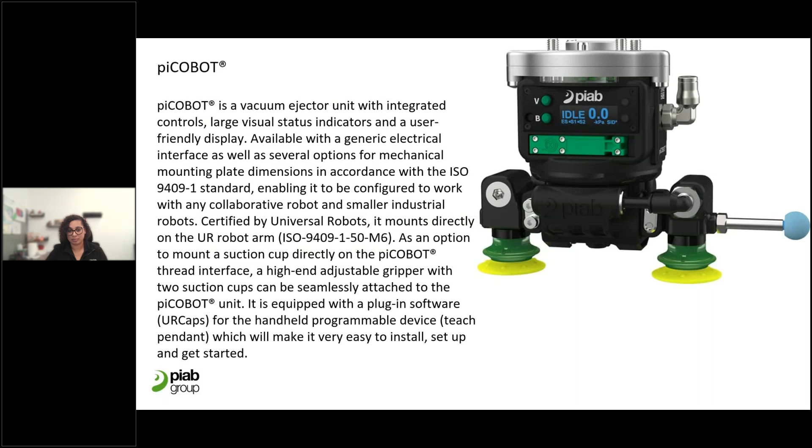But with this piece here, it has the ejector, the valve is all built into this unit, so it can be programmed for vacuum, blow off, and those functions. You could mount different types of tools. You can see it with the two vacuum cup piece on it now. That part can come off, and it could have just a single cup or even a custom type of tool that could be made for a specific application as well. But again, very plug and play and very simple software.

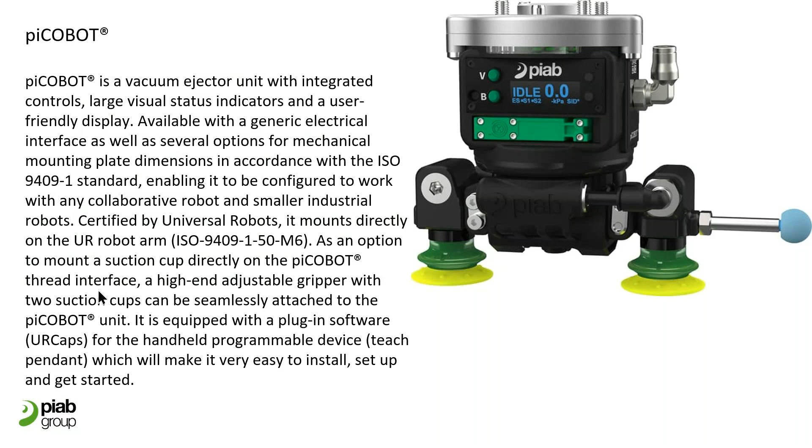If we look at the following page. So the required air is about 65 psi, it will draw 1.23 SCFM. Overall capacity 15 pounds or 7 kilograms. It only weighs about 1.42 pounds, so it's quite lightweight and helps maximize the payload capacity of any cobot. And please keep in mind the gripping capacity is 15 pounds. This could be variable based on the porosity of the load.

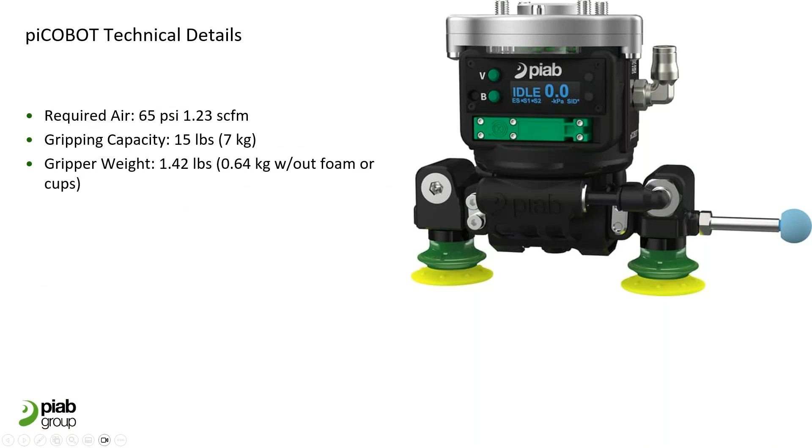The next tool in this series is the PiCobot L. So not much different than the PiCobot, other than it's a little bit larger footprint, but also a much larger capacity. 35 pounds is the maximum payload for this piece. Again, many of the same functions.

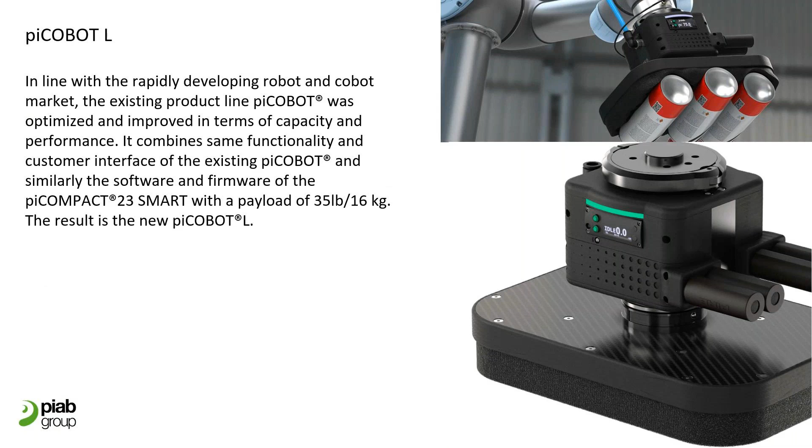For those familiar with the PiCompact 23 Smart vacuum pump that PIAB offers, this uses the same technology, the same type of cartridge and feedback as that pump. So very intuitive, and again, builds on what the PiCobot series does with a larger footprint.

If we look at the technical details, the minimum required air in feed is 72 psi, 1.53 SCFM, and then 32 pounds for maximum capacity. And again, the same situation applies based on the load, porosity, and type as well.

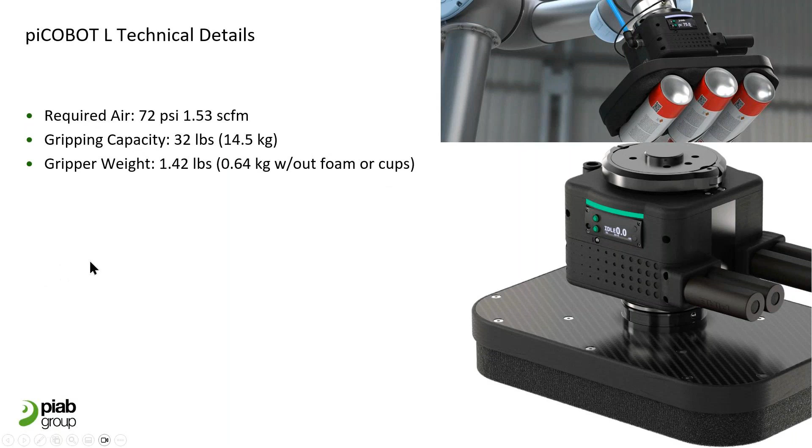Now, a new system that PIAB has developed and launched this year is the PiCobot Electric. We're pretty excited about this pump. It's been in development for a while and finally launched. It has all the features of the PiCobot tools, except instead of using compressed air to develop the vacuum, this is done electric. So, kind of getting more with the electrification of pumps and this type of technology. That's what the PiCobot Electric is there for.

Good on mobile applications as well. One of the unique things, it could be powered off of the cobot itself. It doesn't take any external power source in order to turn it on and off. So it can be totally mobile.

And one of the things that sets it aside from some of the cobot electric pumps that are out there is the amount of flow. PIAB has always been known for getting more flow by using the lowest amount of feed pressure. Well, in this case, using voltage instead of pneumatic air, just in the same rhythm, we can develop more flow, which can handle cardboard boxes easily and other porous types of materials. So that definitely sets it aside from a lot of the competitors out there.

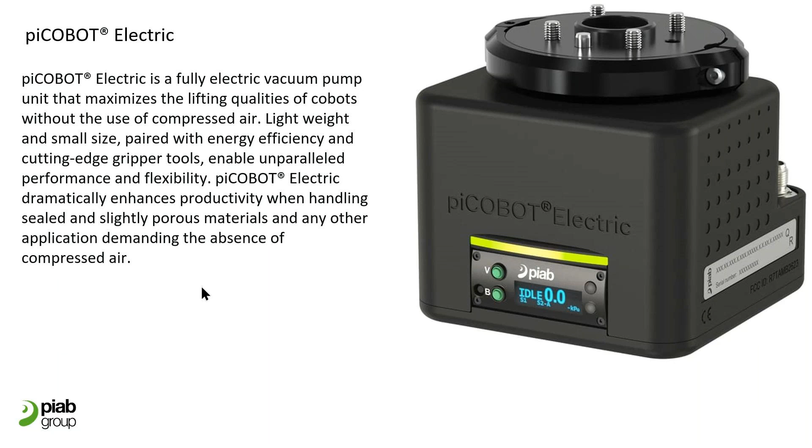Oops, I think it went back.

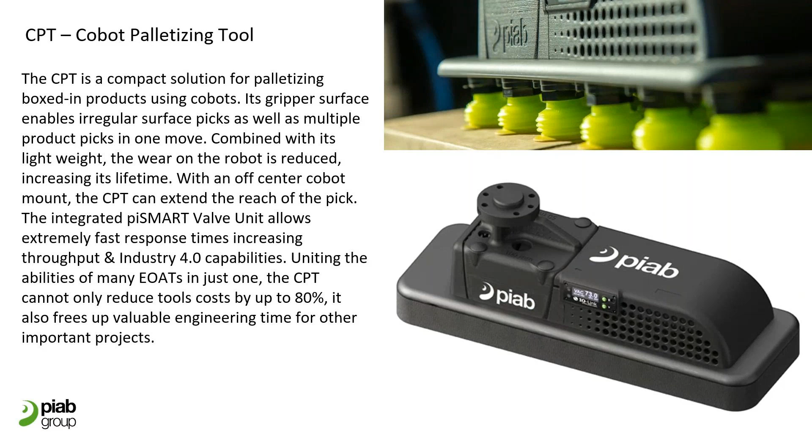Okay, sorry. The next item is the CPT, or the cobot palletizing tool. Again, this was something that was part of PIAB's what's called custom line group, tools that were made on basically a one-off basis. But the popularity of this tool and the usefulness has brought it into the full lineup of tools now. So if you go on to PIAB.com, this is now a configurable item.

And this is great for palletizing, cobot palletizing, again, a quick growing business. This type of all-in-one tool is a great addition to our lineup. Again, same technology as far as the vacuum pump and the feedback built into this tool. It's IO-Link ready. Again, the same features of the PiCobot or PiCompact series pumps are built into this as well.

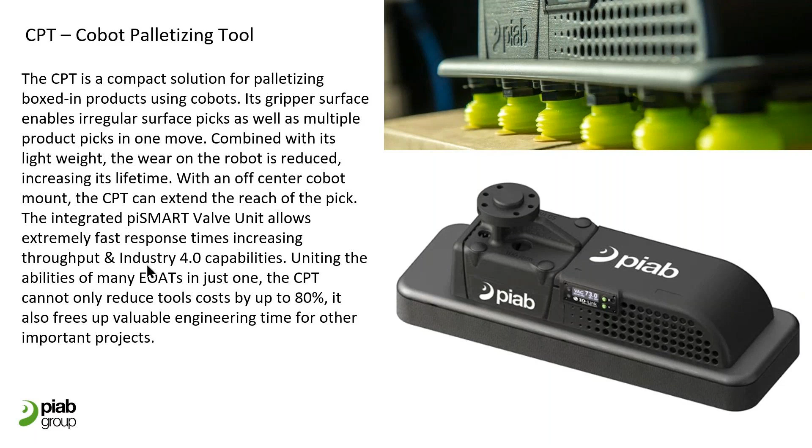And you could see the mounting. It has two different mounting features on it, depending on the amount of offset. So if you see where the robot mount is, that part is removable and it could be turned so you have more extension or less. One thing to keep in mind is that mounting position does have an effect on the overall capacity.

The maximum capacity of this at 87 psi of feed pressure is about 44 pounds. And again, it's a pretty lightweight gripper, 3.64 to 5.84 pounds. The one on the top right could have rows of suction cups, or it could have a plate that has a foam gripper as well. And those would be the difference in the overall weight. And there's also three sizes of different footprints for this tool as well.

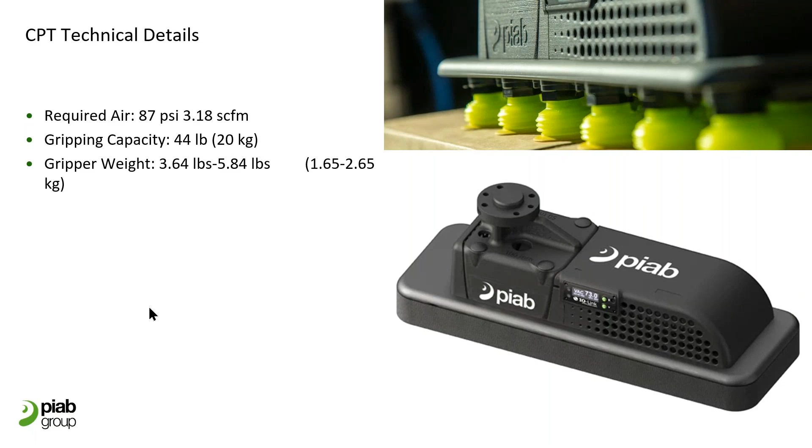Next is the Kenos line. One tool that's becoming more and more popular from the foam gripping side is the KSL, or the Kenos Safe and Light, as you can see in the center. This is a very simple tool that could be mounted to any cobot, and it does require a single compressed air feed that would go to it. But this has the pneumatic ejector and everything built right onto the pump itself.

Very lightweight piece, very easy to replace the foam. We have a magnetic style foam now that's available for this, so quick to maintain and very easy to use, very lightweight. The body of the tool is made out of a foam material with a carbon fiber top plate that the pump mounts onto. So again, very lightweight. You could see the other types of simple tooling, the Kenos FlexiGrip, in a round or a square orientation, and then the Kenos mini grips, various sizes of round, rectangle, and square.

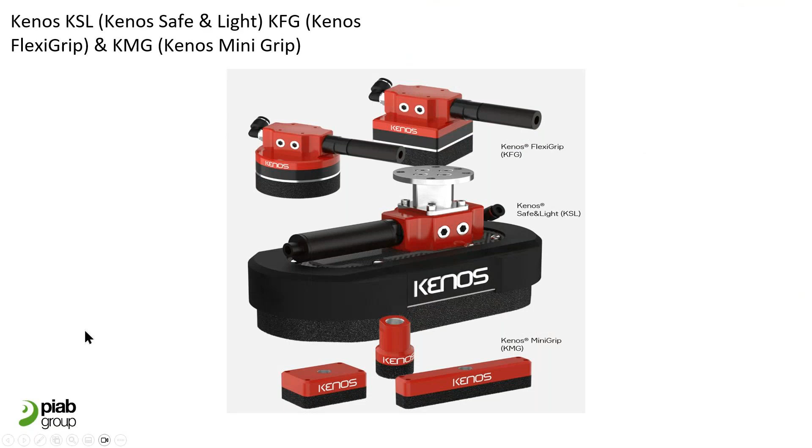Next is the KCS, the PIAB KCS. This is a cobot tool that uses a foam gripping technology as well. The foam plate is removable. There's a 110 by 110 and a 150 by 150 millimeter option, so you could take one off and put the other on very easily. So with foam technology growing in so many different aspects, this has always been a great piece for us as well. And just like all of the PiCobot series, this has everything built into it: the pump, the valve, blow off as needed, and any feedback.

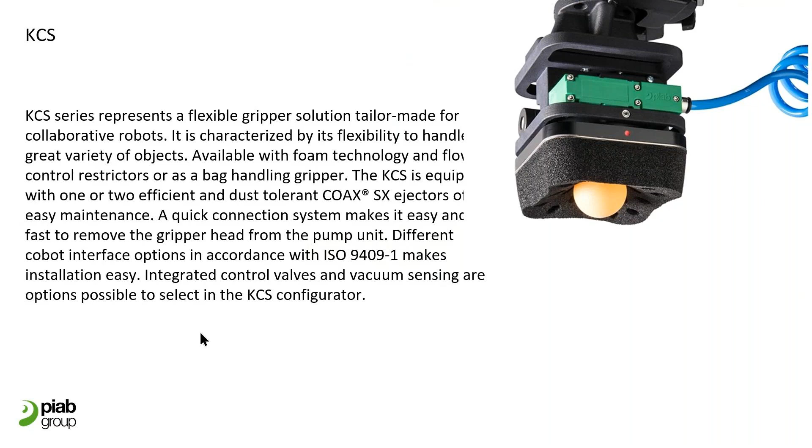This has about 10-pound capacity on this tool at 72 psi of feed pressure. Again, very lightweight like the rest of the series, though. The maximum is 1.67 pounds.

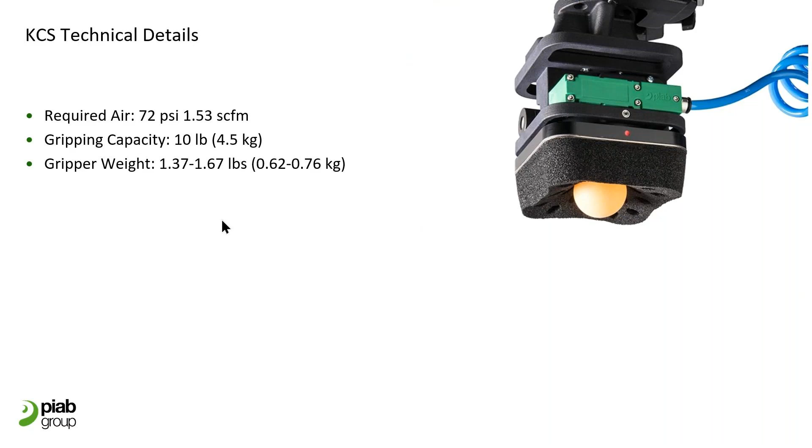The next thing is what's called the PIAB Custom Line Group. You can see on this page, it's just a series of different custom tools that we've built, and many more, obviously. These are custom configurations that could be made, most of them 3D printed. And one of the good things about this is with most of these tools, the vacuum ejectors themselves can be incorporated right into the body of the tool.

You can see, for instance, the third one on the top is made for gripping onto bags, with the cups that have the ejectors built into it. The one on the bottom right has 6 ejectors built into it, and those could all be turned on and off individually. So it could have multiple zones with that configuration as well. So we can design custom tooling for odd shapes or sizes, or to best fit any type of load.

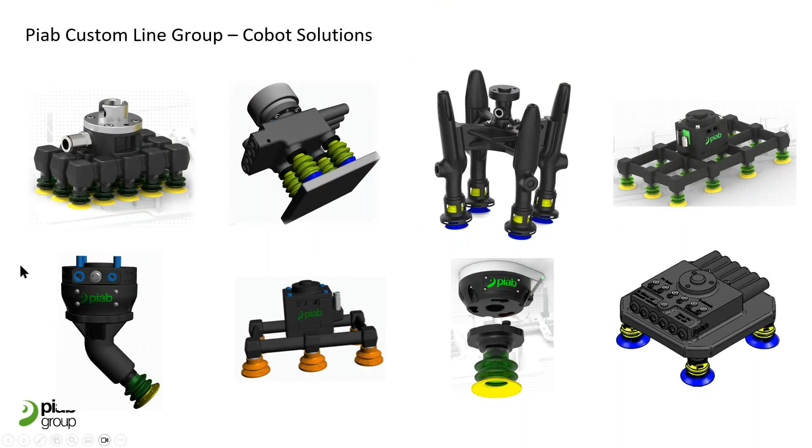Oops, I need to go back. Is it possible to move this back? There you go. Okay, sorry about that.

And then a couple accessories. PIAB is now making an automatic tool changer. You can get that with a docking station where you could park a tool and then grip onto another and put that into service. The foam gripper heads, as I mentioned, on the KCS, there were 2 sizes. But if you were utilizing the Pi Cobot Large, for instance, you could see sizes that go up to 420 by 260 millimeters. So it's a pretty large rectangle surface for that as well.

The adjustable suction cup head that you saw on the Pi Cobot itself, and then obviously any suction cups that are suitable for the different load types that PIAB offers such a wide array of.

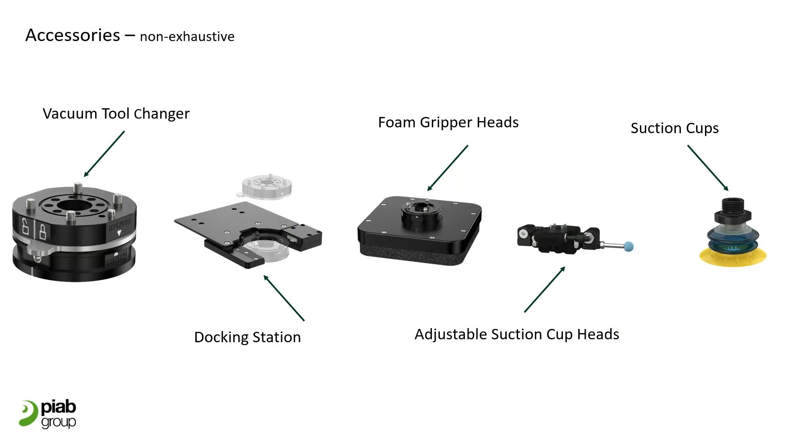All right. So with that, we'll ask any questions. Ron, we do have a few questions for you. Quite a few, actually. So we'll take a couple minutes here, and if we have to get to some more at the end, we will.

First question I have, does the PIAB Pi Cobot Electric work with any robot manufacturer, or is it available with a universal communication interface, IO-Link, Ethernet, digital I/O, etc.? The Pi Cobot Electric currently works only with 3 types of UR robots, and those are the E series, the UR5E, the UR10E, and I believe the UR16E. Those are the only working models right now. I believe in the first quarter of 2025 that will be opened up to other models, but it is limited right now on those particular cobots.

Okay, great. Next question, how does the Pi Cobot Electric handle porous products compared to the non-electric one using compressed air? Again, it does give up a little bit of flow compared to anything that's using compressed air. It's probably more susceptible to the porosity than a compressed air tool right now. But again, for this feature and this new technology of electrification, it does have quite a bit more flow than the other electric pumps out there. And the spec sheets on these are available easily at the PIAB.com website, where we could look at any individual flow ratings versus another.

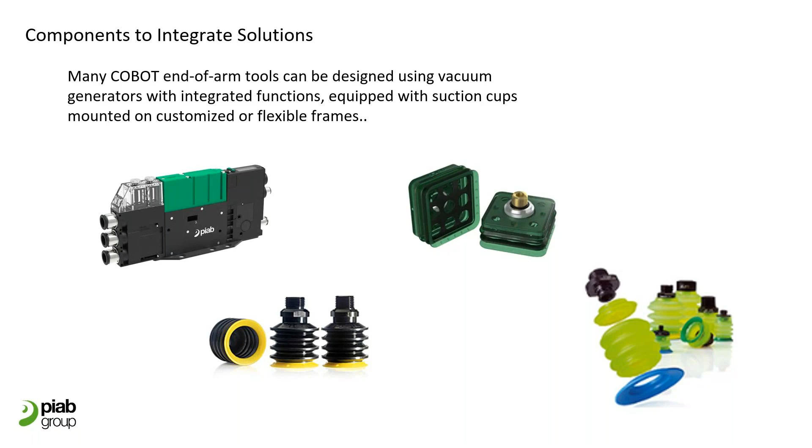The first solenoid valve is the control valve that allows the compressed air to go into the vacuum generator unit. That is the same COAX technology that PIAB uses, but the cartridges we use here are very resistant to dust environments. The second solenoid valve is used for the blow-off function that sometimes is required to release the parts very fast.

So we have a different type of configuration. It is very flexible. For example, this valve, the solenoid valve for control, can be a double solenoid valve, so we have a bistable possibility to make the end of arm tool safer.

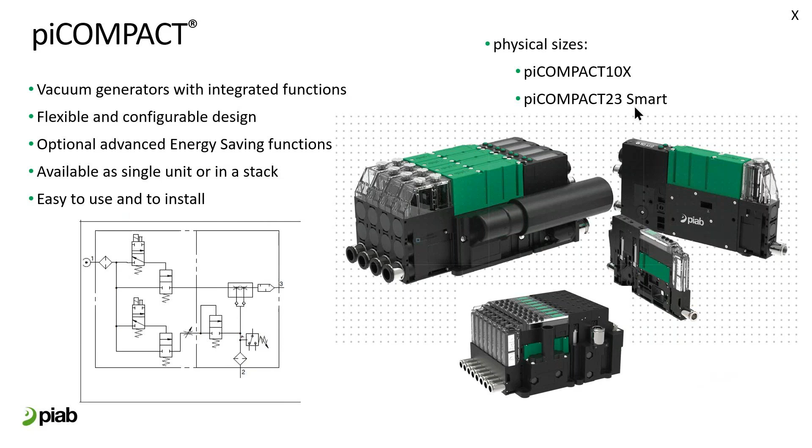We have two different sizes of the piCOMPACT, the 10X and the 23 Smart. But basically for end of arm tools, the 23 Smart is the one that we recommend because of the high flow that we can develop with these units.

The cartridges that we use are the ones you can see here. Those are very resistant to dust. And usually for end of arm tools, we recommend the SX42, which has enough flow to grab cardboard boxes that are usually porous.

Here we have an integrated solution, a very lightweight solution. Each piCOMPACT weighs less than 12 ounces.

We can create an end of arm tool that is very safe using the two solenoid valves. We can increase our speed using the blow off, and we have the energy saving function to reduce the operational cost of the end of arm tools when the boxes are not very porous, or when we are managing products that have no leaks.

We can program a preventive maintenance option because of the possibility to set the vacuum level at a maximum and a minimum, and to have the signal that we have grabbed the part, we can make a type of surveillance in the system, and finally predict when we require, for example, maintenance.

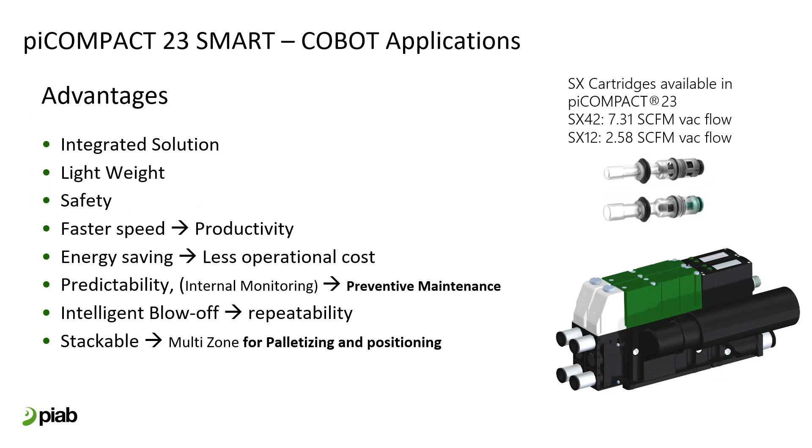And the blow off that I already mentioned. And stackable, that was the function that I mentioned before for multi zones.

This is the way that it is connected, the SpiderPik system design that IRIS is going to present later. Basically, it includes two Pi Compacts. One of those manages one zone of the system, and the other piCOMPACT manages the second part of the system.

In this case, when you pick two boxes at a time, both units are energized. But when you need to release only one box, you need to turn off the power to only one of the units.

The system design drastically affects the performance of a palletizer, because it is necessary to take into consideration the vacuum level that is required and the time of response of the unit. This is the reason the piCOMPACT is very important, because you can install this very close to the vacuum cups that you are going to use in the system.

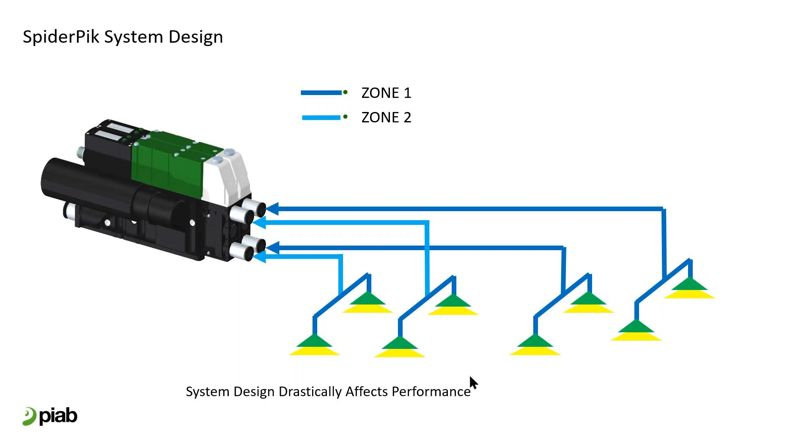We have the possibility to have direct wiring and standard wiring, and use IO-Link for the piCOMPACT. It makes it easy to communicate with any type of field bus system.

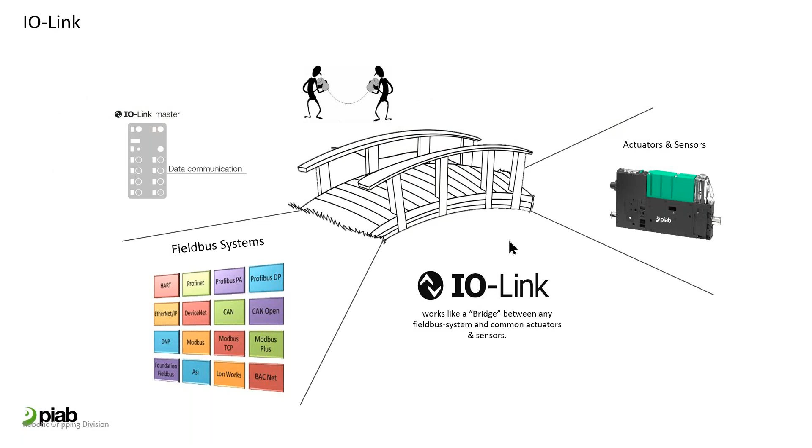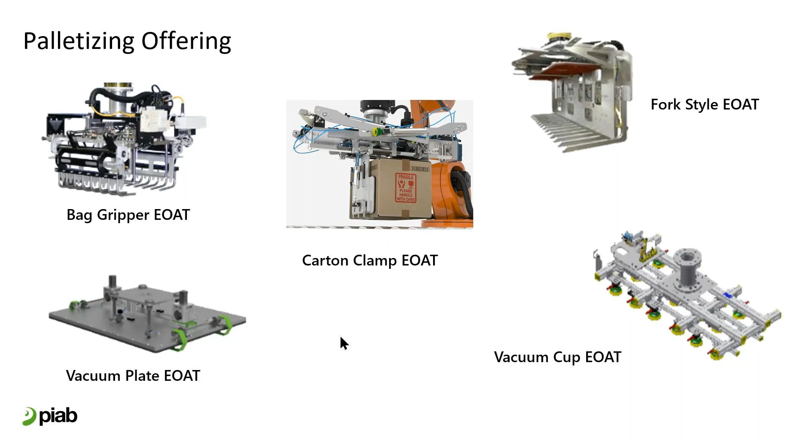Finally, I'm just presenting that we have many different possibilities of end-of-arm tools for industrial robots, for big robots that can handle big boxes or big sacks, for example, even wood or different materials or different elements with high weights in industry applications.

These are a few examples of the materials that can be handled using our big end-of-arm tools, for example, big crates or sacks or big boxes too, or cardboard boxes that cannot be handled by means of only vacuum because of the weight or because of the way it must be palletized.

So for more information, you can contact us and tell us what your application is about, or you can contact IRIS to tell us what your application is and what your needs are.

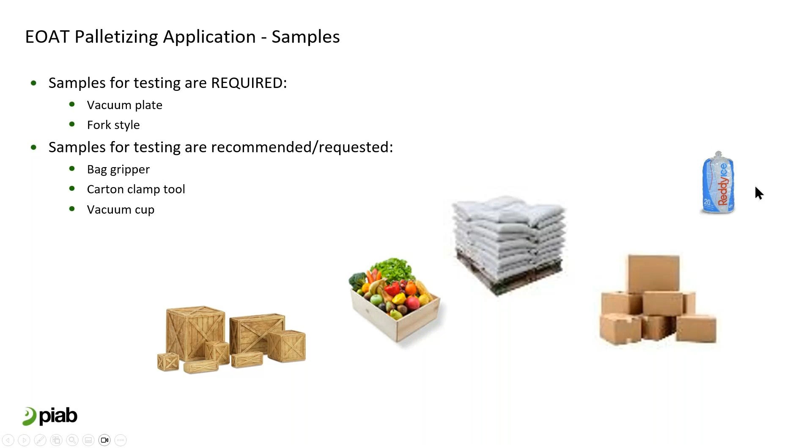Yes, those can be used for dusty environments because we use very dust resistant cartridges without flaps. Additionally, the piCOMPACT have filters that are easy to replace.

What are the advantages of using piCOMPACT in customized cobot tools? The main advantage is that this is a very light unit with everything inside, which makes the customized end of arm tool very efficient and light, having everything in the same body. Additionally, it can be customized so that if you need to maintain the box in case of power failure, you can have a double solenoid valve that still uses compressed air to create vacuum while you have a reservoir available to supply compressed air.

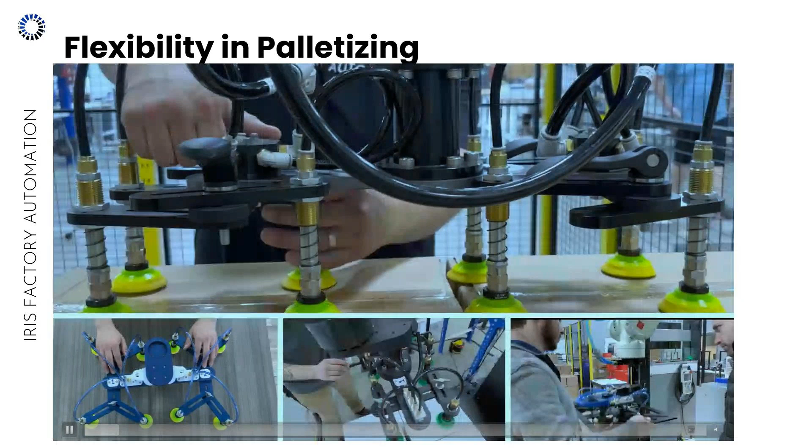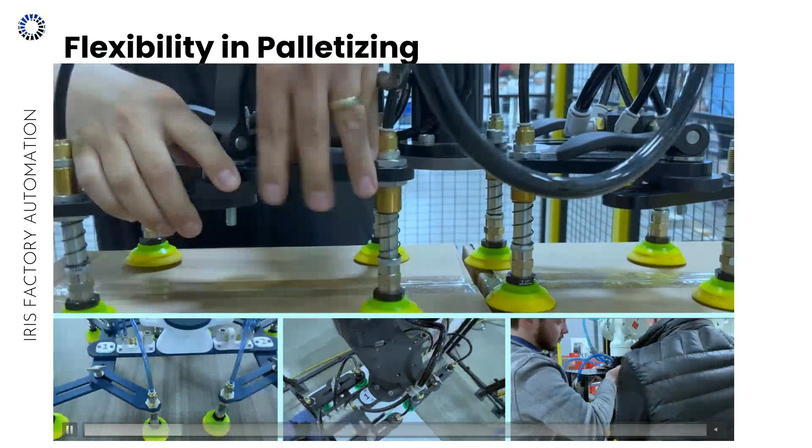Here's our spider pick, which we'll talk about during the presentation. This is our standard end of arm tool, the dual zone tool that Hernando mentioned, which is super effective for hitting faster rates, picking two at a time and being able to independently place those boxes on the pallet.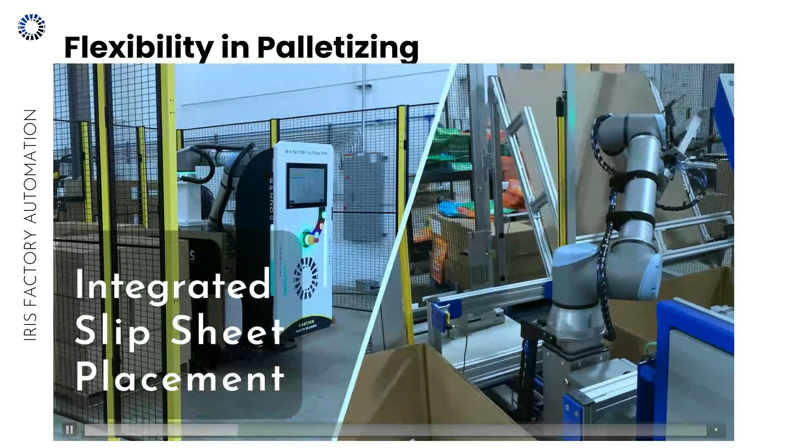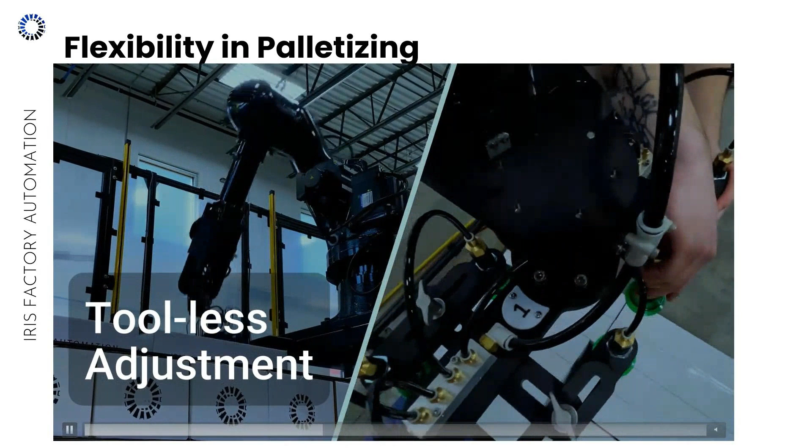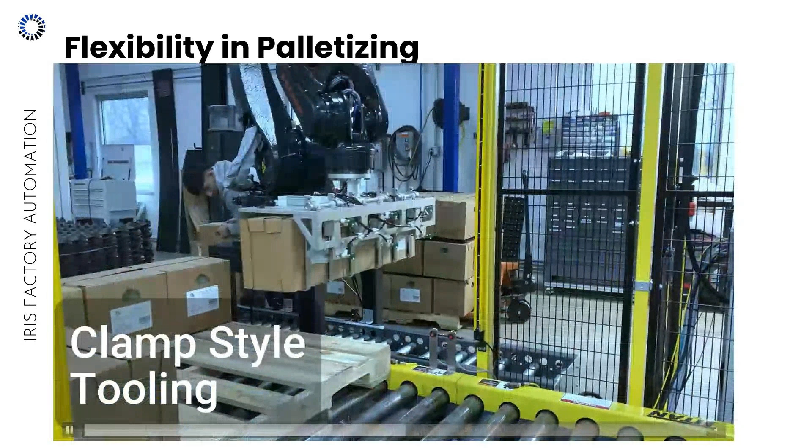Our collaborative palletizers can have integrated slip sheet placement, which is helpful for companies that use corrugated tie sheets in their process. Toolless adjustment, like on our SpiderPik, lets you move cups around without changing tools, which is helpful in food and beverage and consumer goods spaces. You'll also see our clamp style and multi-use tooling for heavier payloads or packages less ideal for a normal pneumatic end of arm tool.

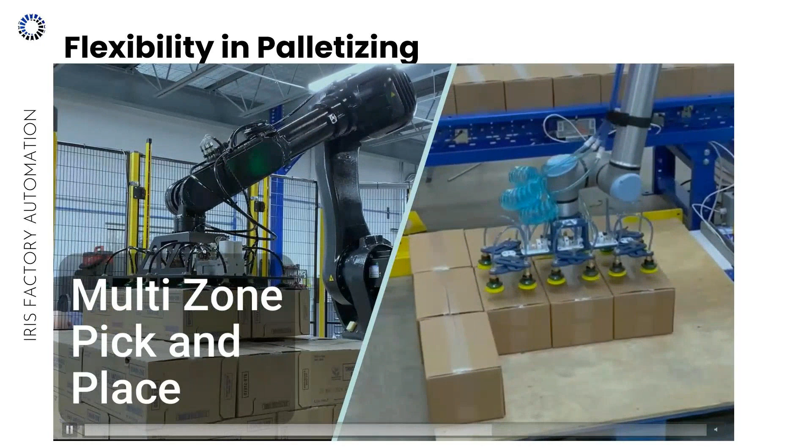I hope you can still hear me. I think the video is a little bit laggy.

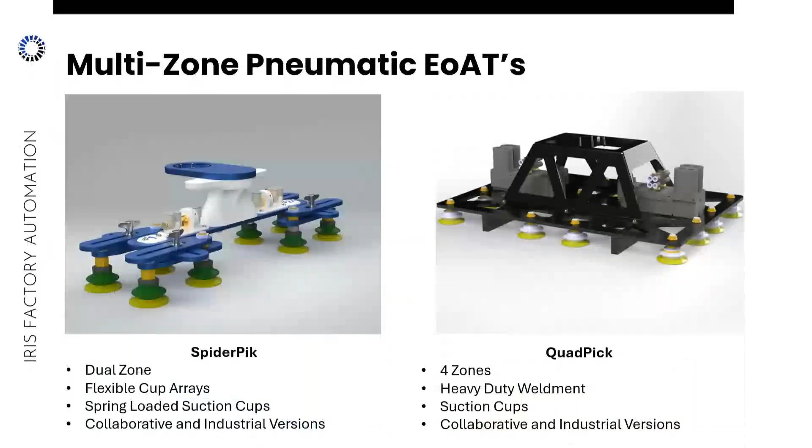Multi-zone pneumatic end of arm tools. Like I mentioned in the video, the SpiderPik is our standard end of arm tool. It's what we use on most palletizer applications because it's designed to be very flexible to accommodate a lot of different box sizes. The SpiderPik comes in a cobot version and an industrial version.

It's a dual zone end of arm tool, meaning we have two independent zones. We can pick up two boxes at the same time and place those independently on the pallet, which is helpful for more complicated pallet patterns where you can't just place two in the exact same spot every time. Instead of going back to the conveyor to pick up a single box, we can place those independently. That's also built into our palletizing software, so it's easy to program without using a teach pendant.

Into the recipe, also on the SpiderPik we have flexible cups that can be moved in and out. You loosen the little wing nuts and move the cups in and out, so you can adjust for different box sizes, whether picking up one large box with both zones or two smaller boxes. You can adjust within a minute or so and switch to the next SKU, which is helpful for contract manufacturers or high mix operations.

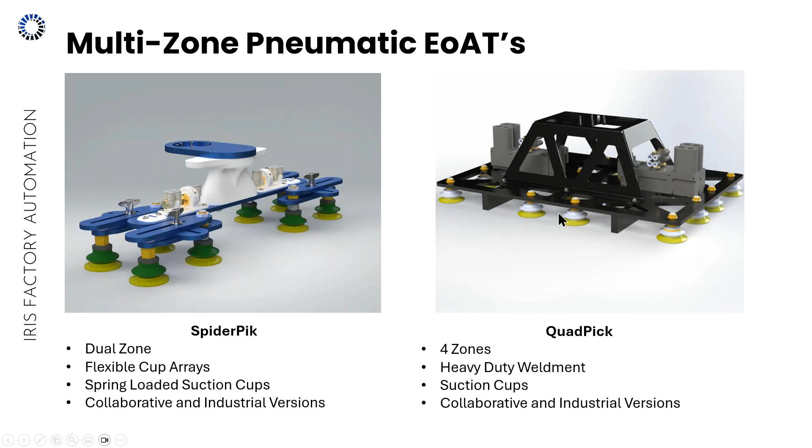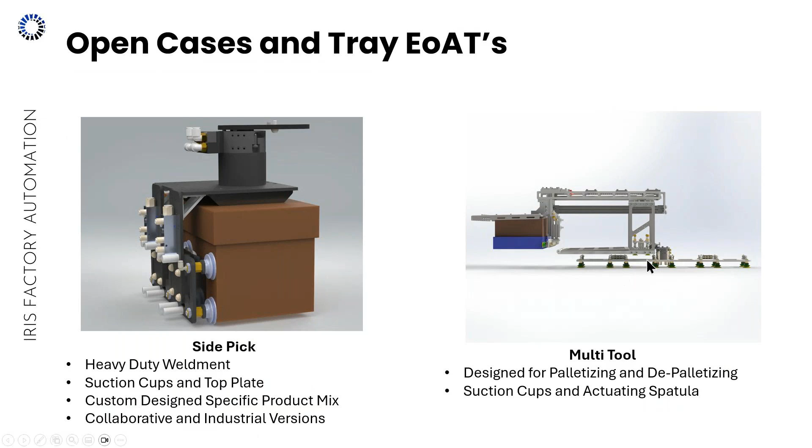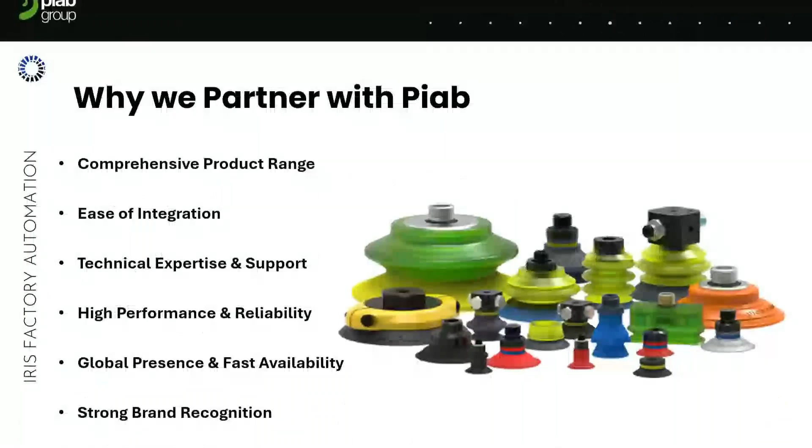So why do we partner with Piab? Piab really has a broad selection of end arm tool components, including vacuum pumps, suction cups, grippers, a variety that really covers a variety of industries and product types. Utilizing their components is kind of a no-brainer when it comes to choosing a partner for that. And really they're designed to be very easily integrated into other OEMs or integrators tools. That's another reason why we've decided to work with them.

From a support standpoint, they have great support. Hernando is actually our local support here in Chicago, and it's great to be able to just have him a phone call away. Also our local distributor partners, FPE, are close by, and we're able to get support or help or have them do testing for us. It's really a great partnership.

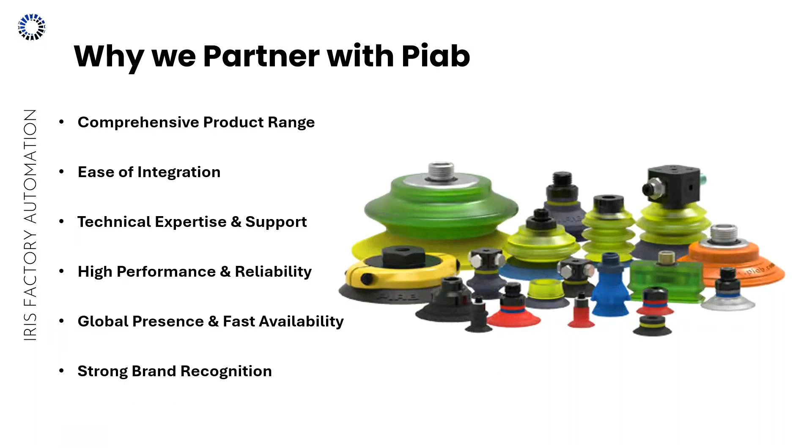From performance and reliability, they're really top notch with their product offering, but they also have great availability. So when we do need spare parts, we can get those very quickly. They're known across the world, so they are a worldwide company, and that really does ensure quick delivery of components as well as the bandwidth for support. And then strong brand recognition, of course, that's important. Our customers know who they are, and they know where to get spare parts if they don't buy it through us. So having them be a large player in the market is very helpful.

I just wanted to share a quick success story from a contract manufacturer that utilizes our systems. We interviewed this contract manufacturer just a month ago, and talked to them about their experience with IRIS. They have both collaborative palletizers of ours as well as industrial, so our RPZ-10, which is our cobot, smallest cobot palletizer, and then our RPZ Max.

This client really was facing high labor costs, hard to keep their employees in general, keep people working. Palletizing for them, in most companies, is a difficult job to keep an employee because it's really a repetitive task, and there are safety issues with lifting boxes all day long and placing them on pallets. So that was something they really wanted to change. They wanted to be more efficient and see some cost savings at the end of the day.